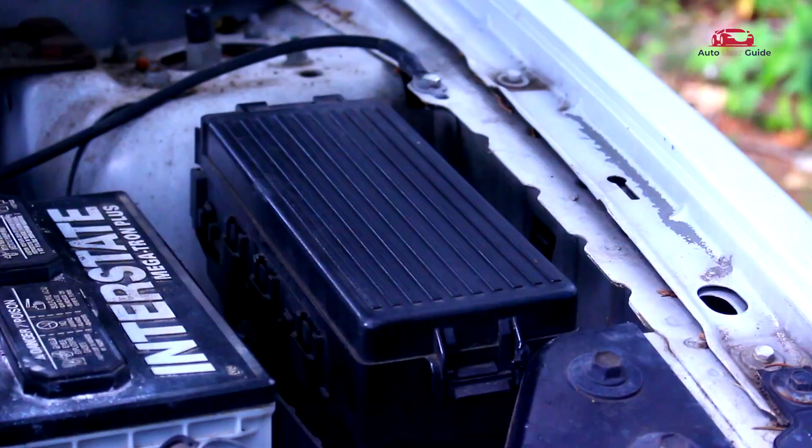Curious about the fuse box location and diagram for the Tata Zest? Wondering where each fuse panel is and what its functions are? This guide answers all your questions, helping you locate and understand every fuse easily.

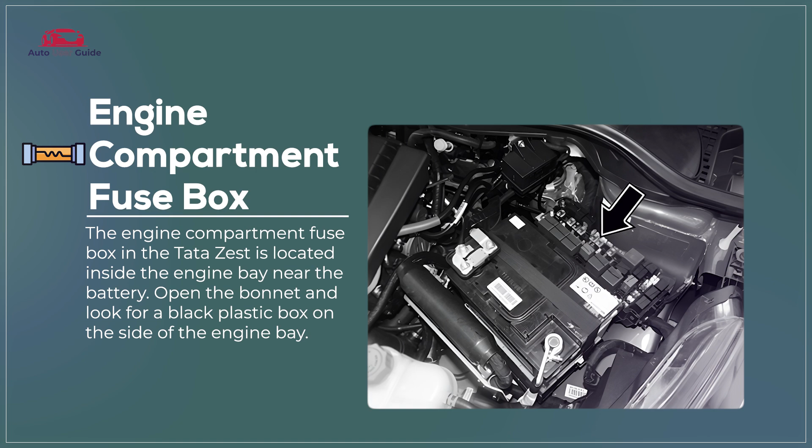Engine compartment fuse box. The Tata Zest engine compartment fuse box contains fuses and relays for critical functions like engine control, lighting, and ABS. It ensures protection against overloads and short circuits. Each fuse has a specific rating to safeguard electrical components.

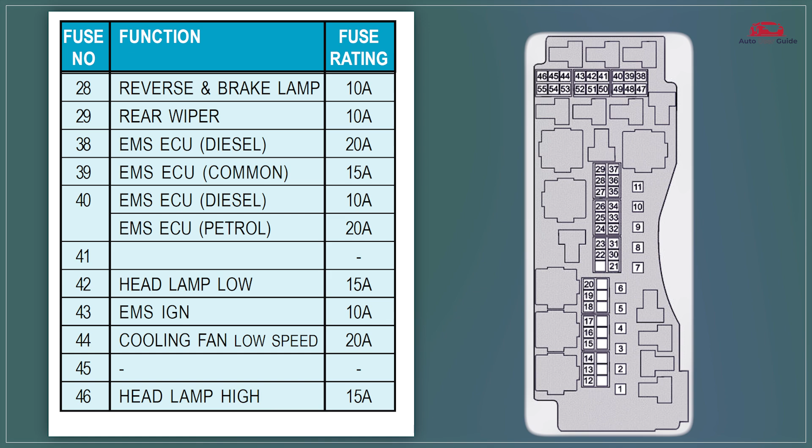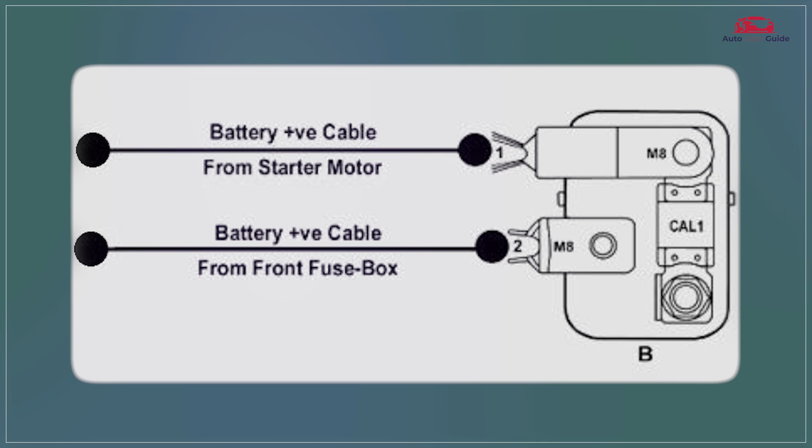Battery-mounted fuse box. The Tata Zest battery-mounted fuse box protects high-current circuits like the alternator, starter motor, and main power supply with heavy-duty fuses.

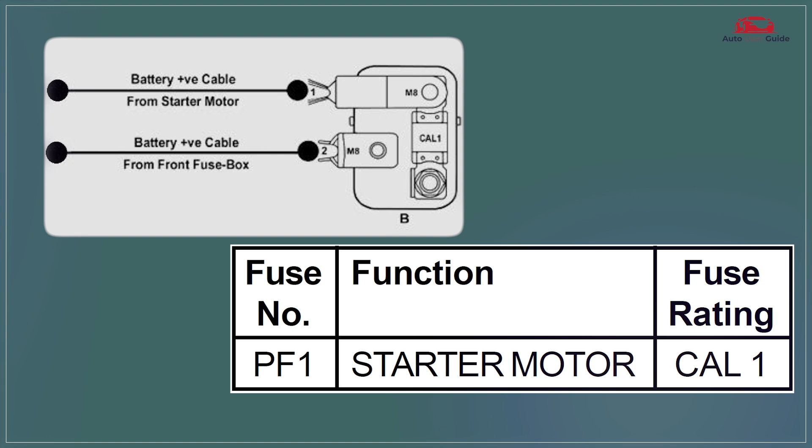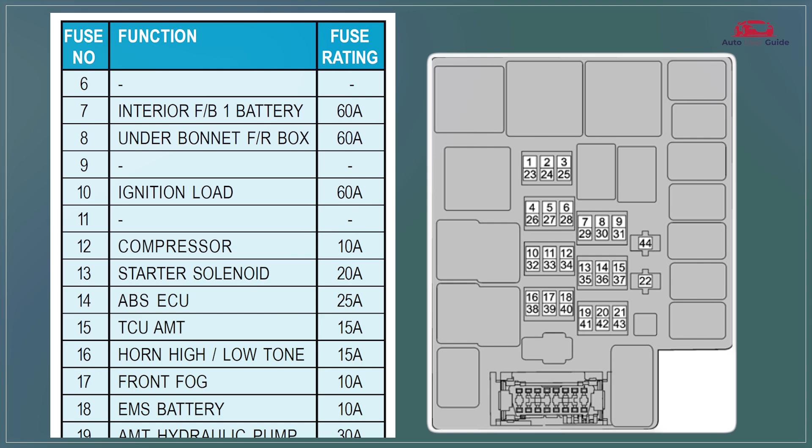Cabin compartment fuse box. The Tata Zest cabin compartment fuse box controls electrical functions like power windows, infotainment, interior lighting, and the HVAC system. It protects circuits from overloads and short circuits with properly rated fuses. The fuse box cover includes labels for easy identification and maintenance.

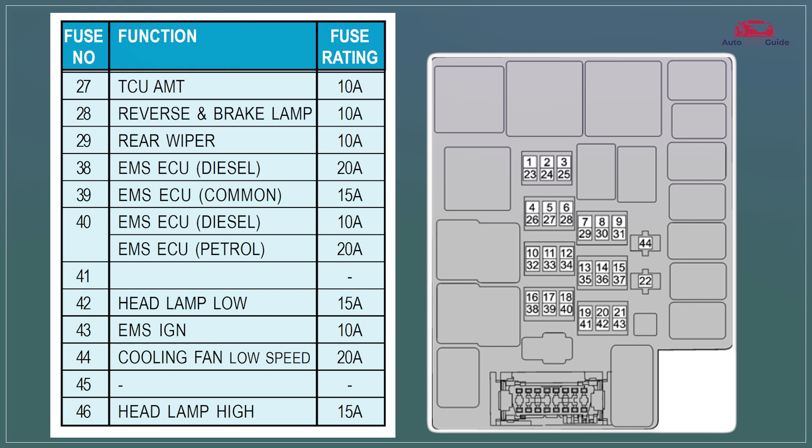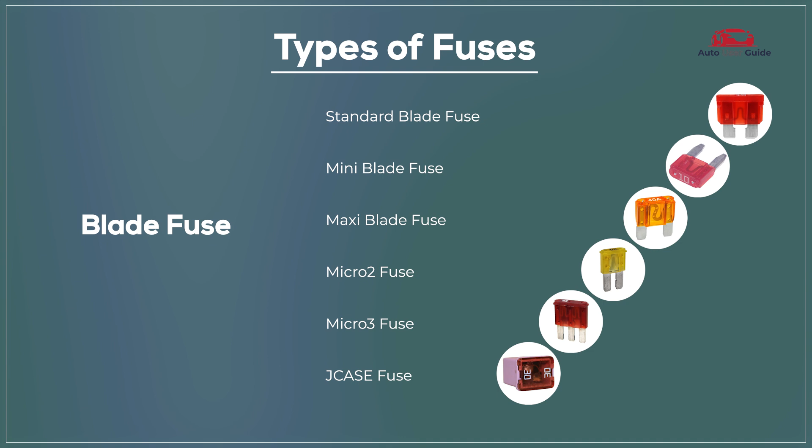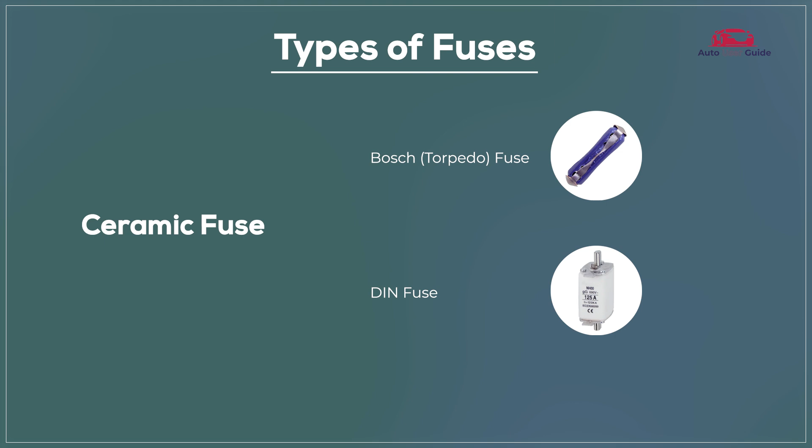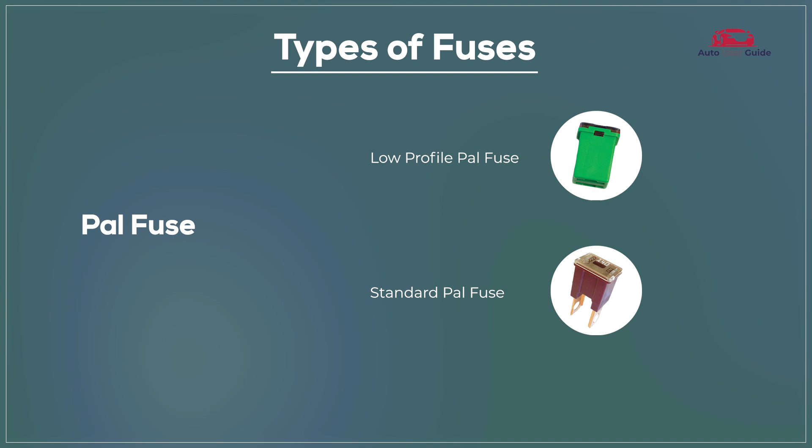Types of fuses: blade fuse, standard blade fuse, mini blade fuse, maxi blade fuse, micro 2 fuse, micro 3 fuse, J-case fuse. Glass tube fuse, AGC fuse, SFE fuse. Ceramic fuse, Bosch fuse, DIN fuse. PAL fuse, low profile fuse, standard PAL fuse. Link fuse, mega fuse, high amperage link fuse.

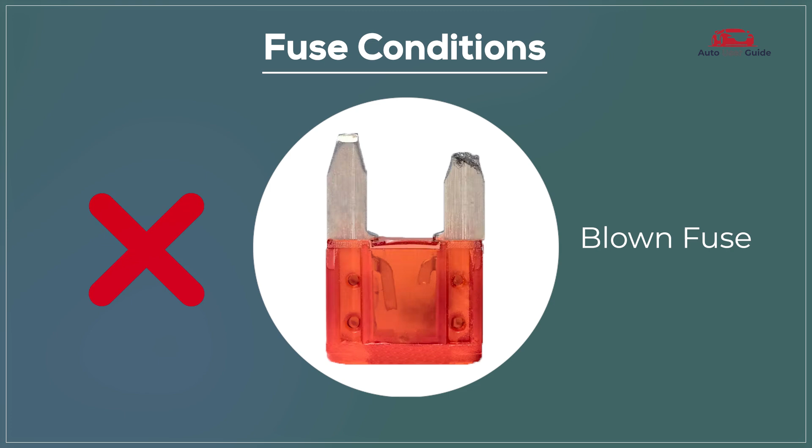Fuse conditions: blown fuse. A blown fuse means it's no longer functioning and needs replacement, while a perfect fuse is in good working condition and performing as expected.

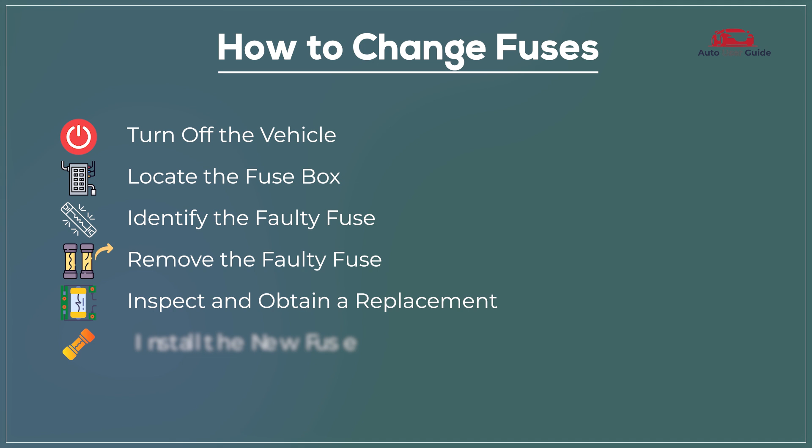How to change fuses: turn off the vehicle, locate the fuse box, identify the faulty fuse, remove the faulty fuse, inspect and obtain a replacement, install the new fuse, test the replacement.